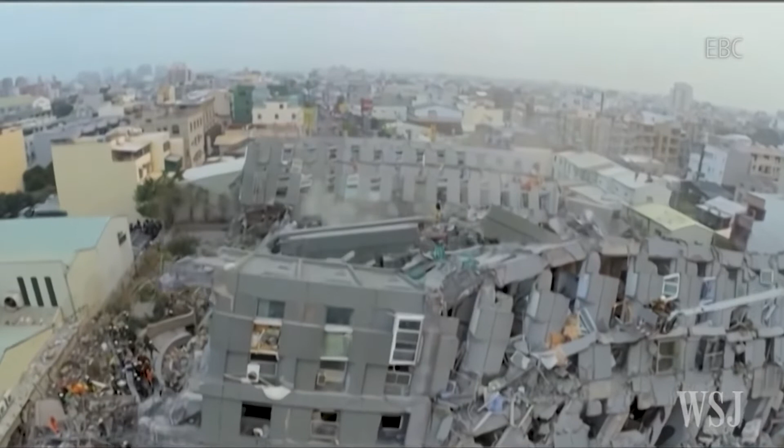Breaking news from Taiwan. The government and witnesses there say a hotel and other buildings have collapsed after a magnitude 6.4 earthquake. On a major earthquake that has rocked central Mexico, a 7.1 magnitude. Italy, where the most powerful earthquake there in decades.

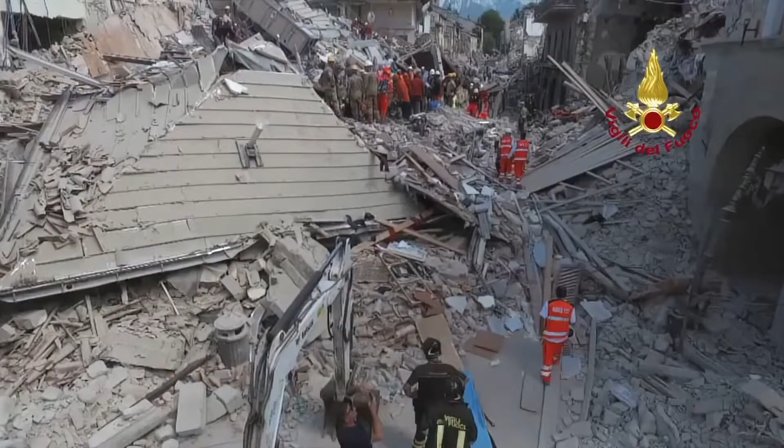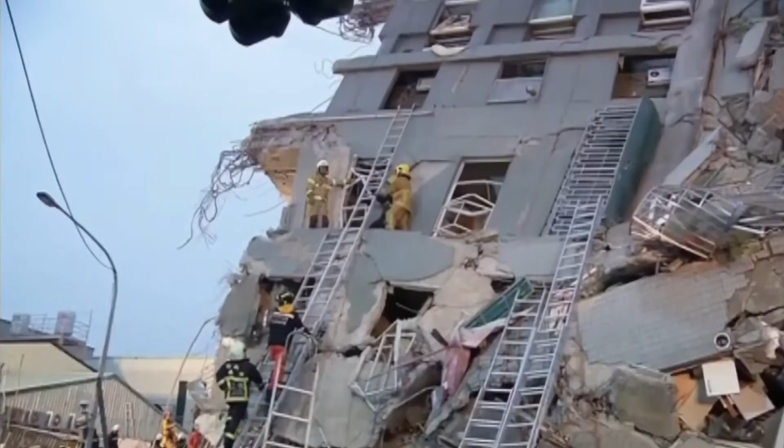The reduction of seismic risk represents a crucial and urgent challenge of our century, the solution of which requires the launch of a prevention program capable of combining innovation and economic sustainability. Designing steel structures at the expense of reinforced concrete would certainly represent a big step forward.

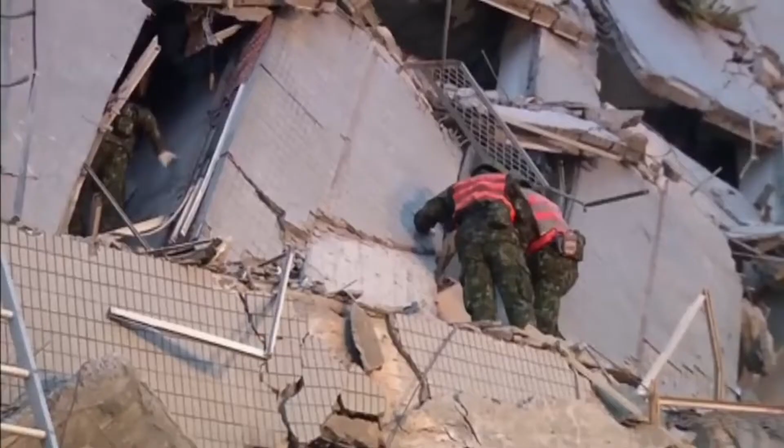In fact, due to its high ductility, steel can reach levels of seismic energy dissipation that are precluded to the other structural materials. Proof of this is the widespread diffusion in geographical areas where earthquake intensity is particularly severe, such as the United States and Japan.

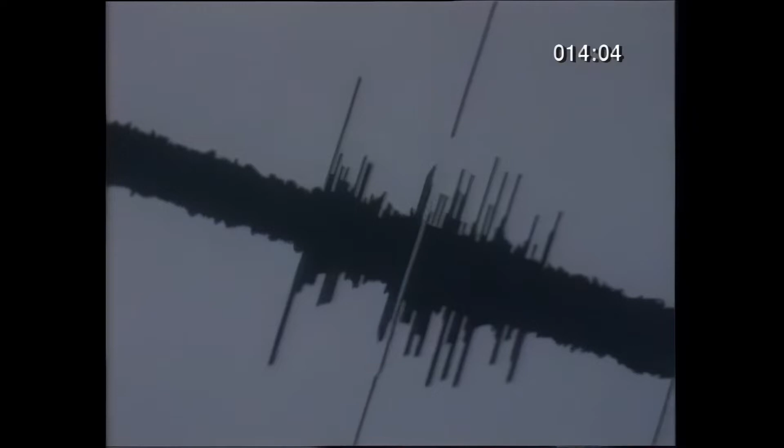However, even steel buildings are not exempt from the structural damage that a destructive seismic event entails. This does not exclude that soon there may be buildings with zero seismic impact. This is what the researchers of the Freedam Project are working on with the design of beam column connections that do not suffer any damage during destructive seismic events, hence the acronym Freedam, free from damage steel connections.

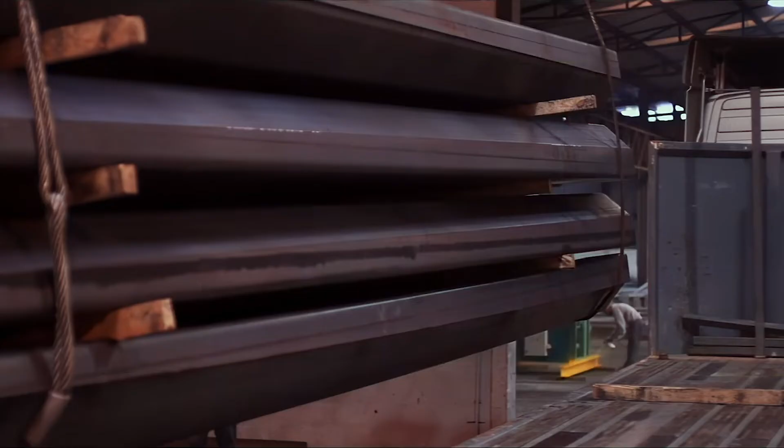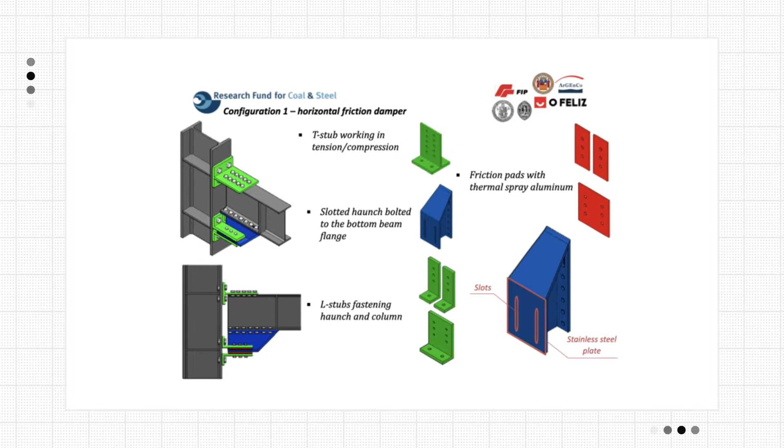The project was developed by University of Salerno, University of Naples Federico II, University of Coimbra, University of Liège, FIP Industriale and O Feliz Metalomecânica. But how does it work? Normally, the energy caused by the seismic wave of an earthquake is dissipated in the supporting members, in the beams and/or columns. However, even when the structure is able to withstand the seismic event, it

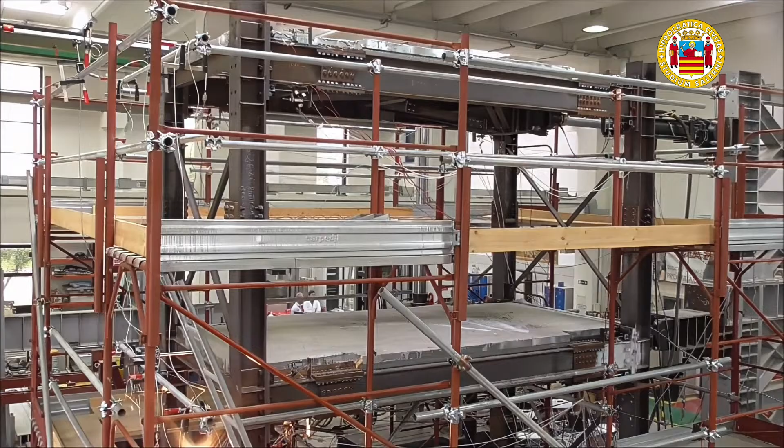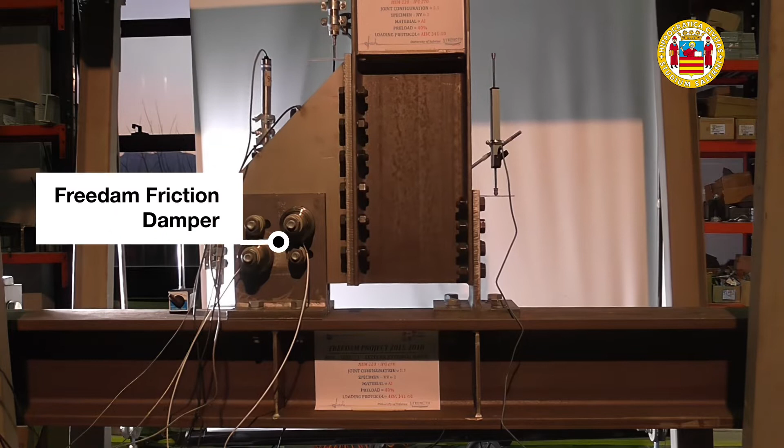suffers structural damage. The Freedam Project is aimed at developing a new design strategy whose objective is the design of connections capable of resisting without any damage the plastic rotation demands due to destructive seismic events. The innovative scope of this project lies in the idea of equipping the beam column connection with a friction damper located at the level of the lower flange of the beam, which dissipates the seismic input energy, ensuring that the

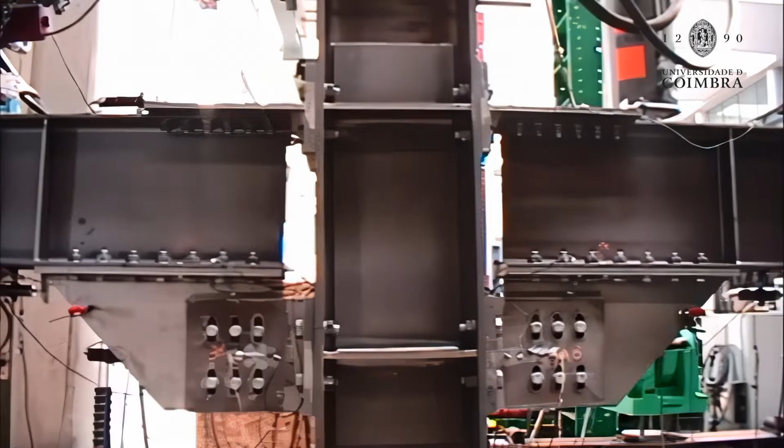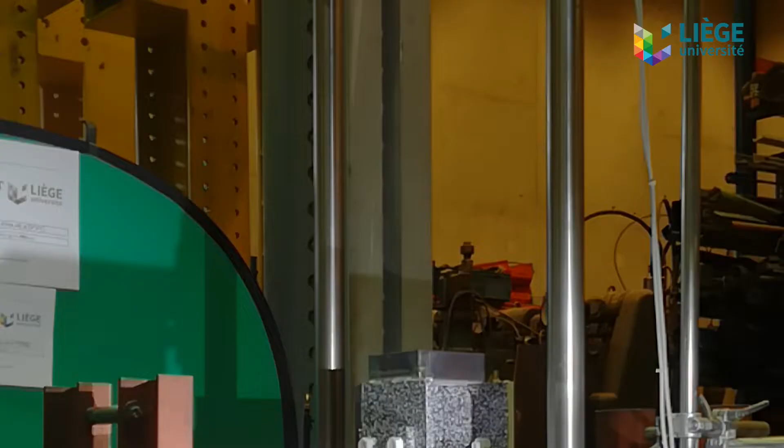structure is not damaged. The flexural strength is derived by the product between the frictional resistance of the damper and the lever arm. The connections are designed to show large and stable hysteresis loops without any damage to the steel connecting elements.

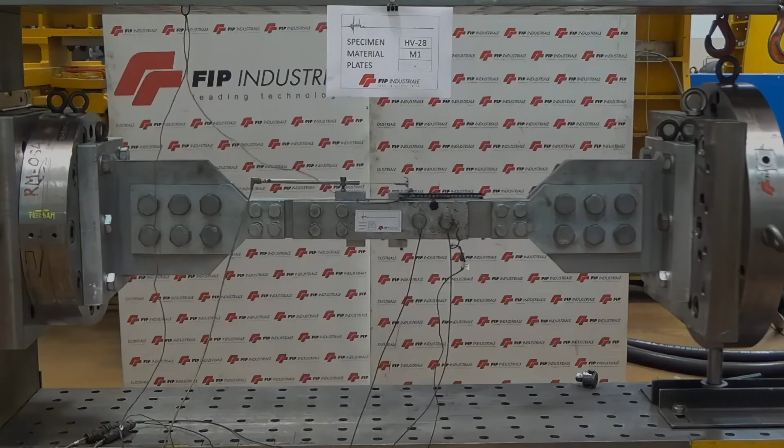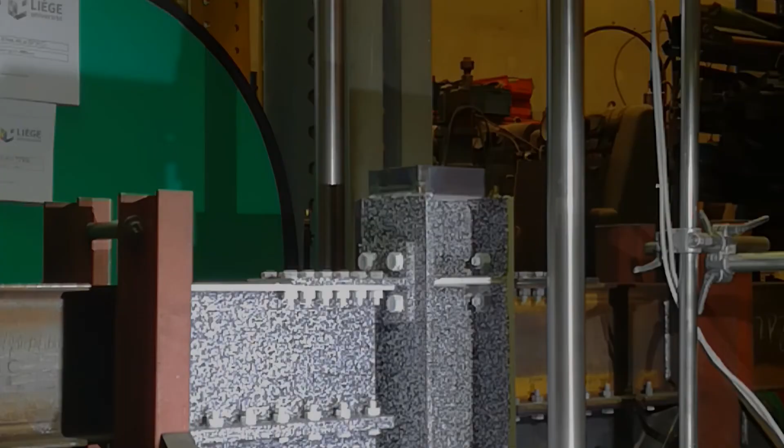The research project went through a considerable amount of experimental tests: 120 cyclical tests on friction dampers, 8 tests on external beam-to-column connections, 8 tests on internal beam-to-column connections, 6 tests on beam-to-column connections subject to impact loading, and 5 seismic simulation tests with the pseudo-dynamic testing method.

From the initial research and experimentation phase, the project followed a dissemination phase, Freedam Plus, through the publication of an English language volume of the project, which was then translated into 20 languages. The future belongs to those who envision and design it today.

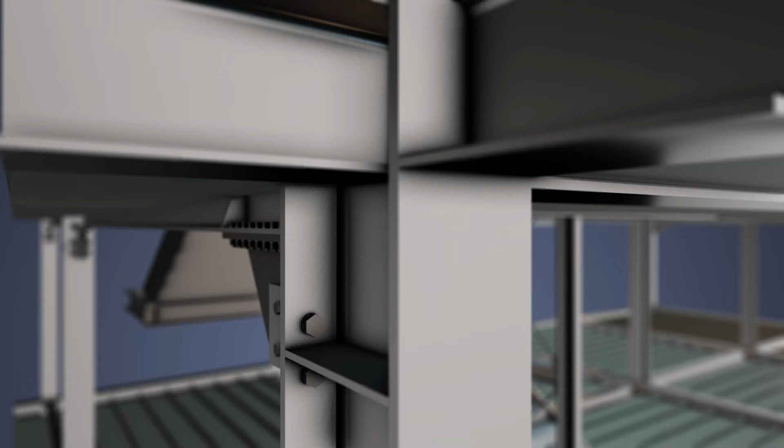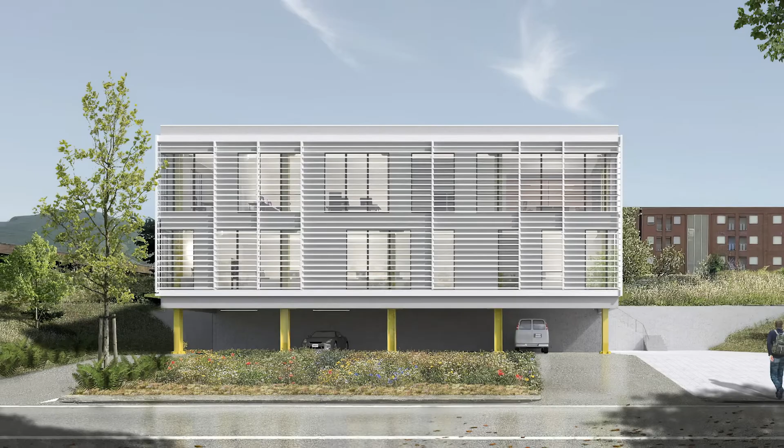Perhaps the future is much closer than one can imagine, because the researchers from the University of Salerno, starting from July 2021, are working on a demonstration project. A third European project is underway, Dreamers, which will end with the construction of the first building in the world with Freedam technology within the UNISA campus. Dreamers: design, research, implementation and monitoring of emerging technologies for a new generation of resilient steel buildings.